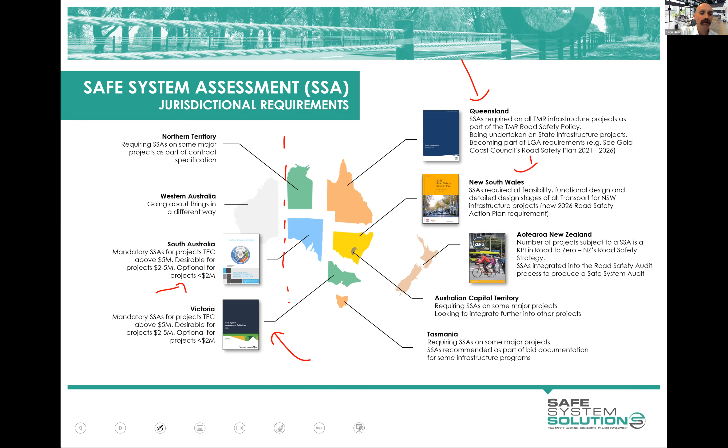Put a line down there. Okay, so what sort of benefit do we get out of doing this safe system assessment?

I mean, it's another process. Do we really need to add more processes into infrastructure projects and the like? Only if they're going to add value.

You know, town bypasses, we're talking major duplications of outer suburban arterial roads, freeway upgrades with extra interchanges and the like.

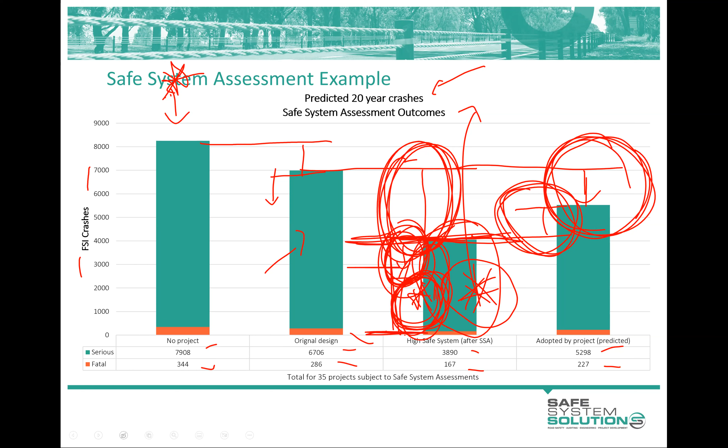Are you happy to get into more specific questions on people's safe system assessment? Okay, so referring to intersection values, got someone with a major road which is 12,000 vehicles, and the assessment takes in two intersections, one at 8,000 and the other at 9.5. So do we go 12 plus 8 plus 9.5 equals 29.5, or 12 plus 8 plus 12 plus 9.5 equals 41.5? Either way, it's a score of 4.

However, if it was a lower amount, which one would you do? So is this one intersection or multiple intersections? Two intersections. Are you drawing two intersections here? Yes, I am. Good, okay, great. So what did we say? The main road has 12,000. Yes. And this side road has 8. And the other one, 9.5.

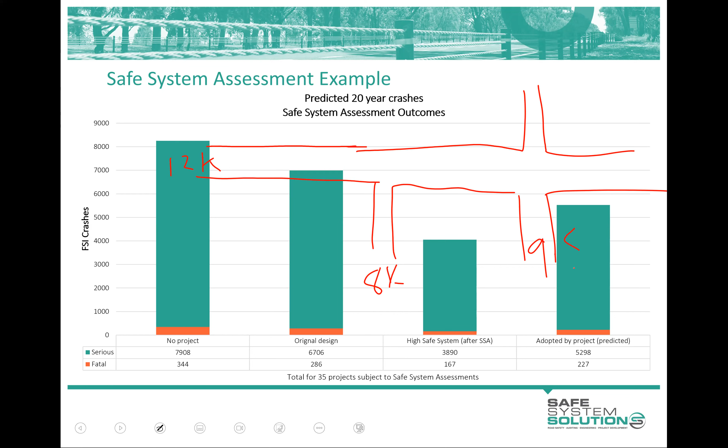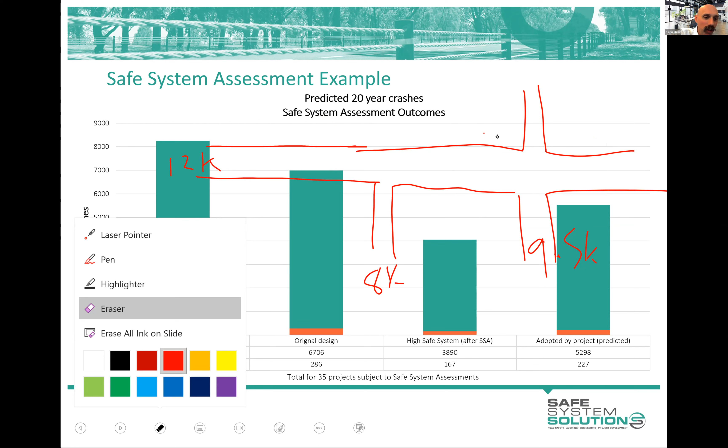So the way to do this, and we do have a fact sheet on this - if I was undertaking a safe system assessment on this, I would go... matrix 1, matrix 2. Actually, I would undo that, because that's pretty much right. I'm going to chop it up in a slightly different way. Matrix 1, matrix 2. So you actually do 2 matrices for this.

And that way you add your 12,000 and your 8,000 in this one, and your 9,500 and your 12,000 in this one. Those are your exposure scores, and you will produce 2 matrices and 2 graphs with all of your existing conditions and the like. I just leave it at that - I don't try to create one end score for the whole project.

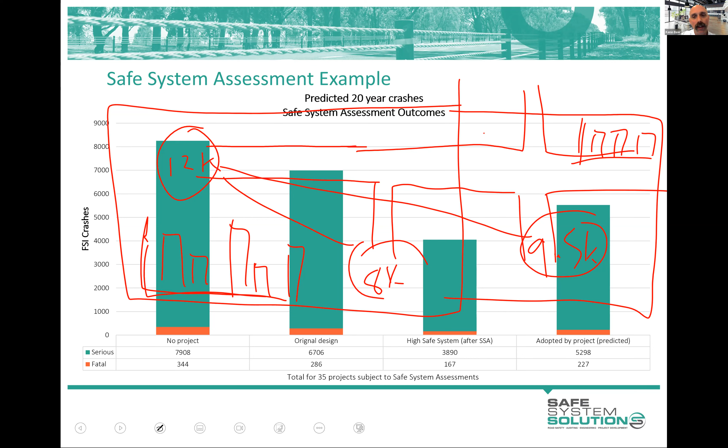The reason I do it like that, and our fact sheet tries to clarify this, is that the Victorian and South Australian governments have said these are 2 legitimate options to do it. But the reason - no, not that one - the fact sheet is actually about how to do a long route or a route project. It doesn't have any pretty pictures, it's more just text on this one.

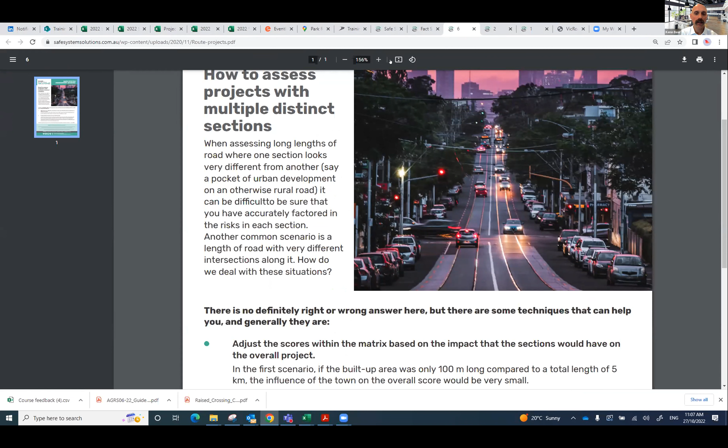The point I'm making there is the second dot point at the bottom - we can't see that, it's not displaying there, Kathy, if you can just scroll down a little bit. Yeah, so that's it. So produce separate matrices for each logical section - you try and find homogeneous sections and chop it up accordingly.

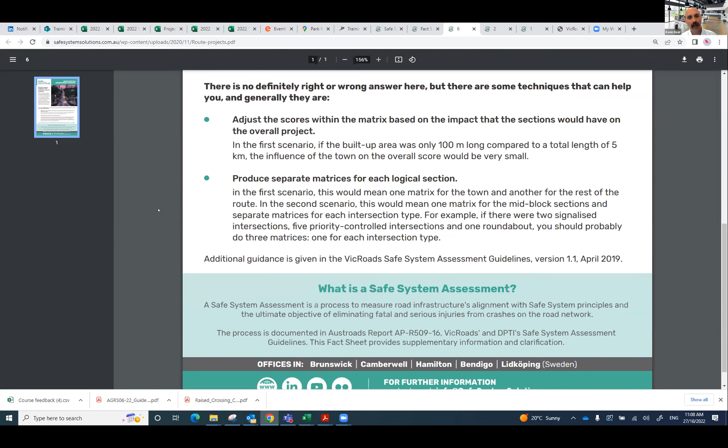The one above it is what my colleague Chris Hall loves doing, because he loves an 18-tab spreadsheet that goes berserk with weighted averages and the like, because you could in theory do weighted averages on all of these to bring it back to an individual score if you absolutely must. But my worry is that if people don't do that properly, you can actually hide deficiencies in an intersection by combining it with a really good intersection and getting an average.

To come back to what is the intention of a safe system assessment - it's to flag things that don't align well with safe system principles and to rectify them. And if we use the trickery of numbers to average things out, it's not a good outcome. The trickery of numbers, hey?

Okay, so for Walden, does he need to do 2 matrices? For the safe system assessment assignment? Yeah. No, you can just do one of them, you could just pick one of them. We'd be very comfortable with that. In the bit when it says scope of audit, you could do a snip of your design, or you could say you've done this intersection and lead in.

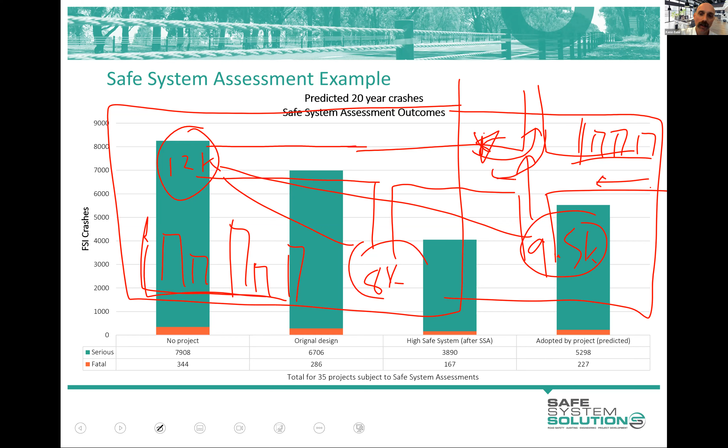Okay. Thanks, Kathy. Now, how are we going on time?

We're going to take a break at some point. It's probably a bit early for that. I'll plow through a little bit more, and I still do want to hopefully finish a little bit early so people have time to get stuck into some stuff. But I'll cover off a few more things.

Okay, the benefits of a safe system assessment. You saw there some numbers in terms of that evaluation, and anybody who would like a copy of that evaluation report, just email through, we can find that. Or it might have even been put in the learning management system, I'm not sure there.

A way of determining how well a project aligns with safe system principles - it's great, we've craved that for a long time. Safe system principles are fairly fluffy, high level principles, and we need something to measure against these. It's a method to compare project design options, with information on changes that will move a project closer to those safe system objectives. A method to assist planners, designers and project managers to take safe system from fluffiness to practice, and a sound basis for future planning and design of road infrastructure.

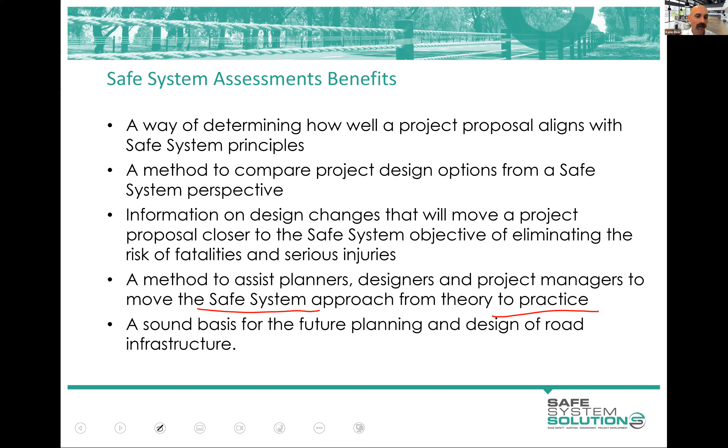Let's talk about the process you'd go through, be it as a local controlling authority, a local government, or a state controlling authority, or different project managers, and then where the safe system assessors can interject. Safe system assessments are best served early in a project. So we go concept, draft, details, build, open it to traffic. The earlier we can do it, the better.

Why? Because people are willing to change their project at these early stages. They are not willing to change much at the later stage. When you do a safe system assessment on a detailed design of a big project and tell them that you suggest they alter their intersection forms completely, they ain't happy. In fact, they don't do anything with it, or tell you to shred old copies of that report, because we never want that seeing the light of day, as we've just done all of our detailed design. Although they're willing to change minor bits and pieces.

Road safety audits, though, work better there, because just the nature of how they're presented, and what they look at, can often be much, much better at these later stages.

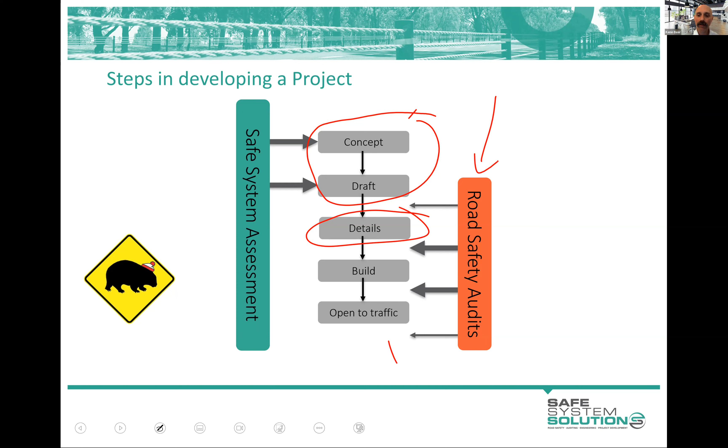And the difference between a road safety audit and a safe system assessment - I'll put a little disclaimer in here. I think it's got significantly better after we released the 2022 version of the Austroads Guide to Road Safety Part 6, which integrated a whole lot of stuff in. But I still say that both road safety audit and safe system assessment do a great job with likelihood identification. Severity, road safety audits only sometimes.

It's sort of integrated into road safety auditing. However, in practice, it just doesn't work sometimes. The absolute classic is that set of traffic signals on a high-ish speed road, 70 or 80 kilometre per hour road, and the road safety audit at no point mentions the scenario of people running the red light and the impact forces we're trying to handle. Everything in the audit is associated with sight lines to the signals, advanced warning, phasing, timing, these sorts of things, trying to ensure everybody has the best opportunity to see and react to the signals. Hugely important stuff, but missing that one of, okay, now somebody didn't. What do we do? What's the forces?

Exposure as its own entity doesn't occur in a road safety audit. It's packed into the likelihood.

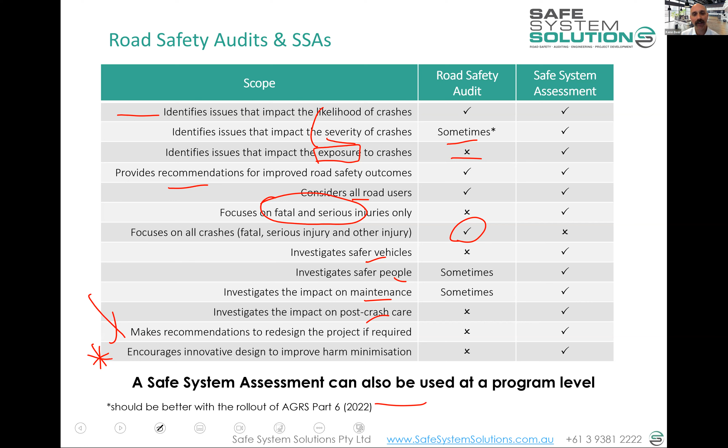Okay, a process that we can go through here. This is the common process of how a safe system assessment happens. So first of all, somebody, and I'm going to say client here, and that could be a road authority or the like, they decide they want a safe system assessment done. Sometimes there's a policy or a strategy that demands that, as I showed you earlier. And they decide, are they going to do a full safe system assessment or a rapid one? I will take you through the difference between those shortly. You're currently doing a rapid safe system assessment. A full one just has a little bit more to it, not a huge amount more.

So the client, and maybe the designer as well, they select the safe system assessment team. Usually if they find a nice independent team that knows this process, has completed this course, and then they appoint them to do this assessment.

They have some sort of commencement meeting and handing over of information. They give them the designs, they give them the project background. This is usually a combined thing. They ask lots of questions about the project. Why are they doing it? What's this? Have you got future growth? Do you know numbers of pedestrians and cyclists? Are there any schools in the area? The list goes on. That's often done in a workshop or the like.

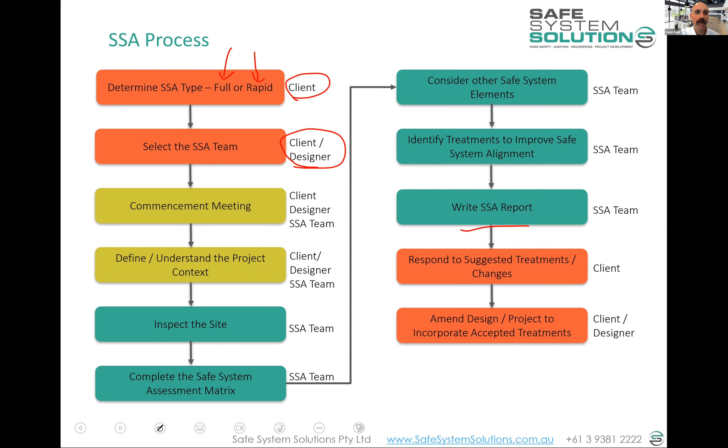Probably a good time just to check if there's any questions at this stage, before I jump into a little bit about guidance and registration and the like.

There's a comment here asking about recommendations sometimes being for RSA, pending who the client or road authority has requested. I'm not 100% sure I follow that... Actually, I think I understand. New South Wales doesn't do recommendations in road safety audits. They're the only jurisdiction that doesn't, and everybody else makes recommendations as part of a road safety audit report. So that may cause some of the confusion around who's asking for it, which road authority.

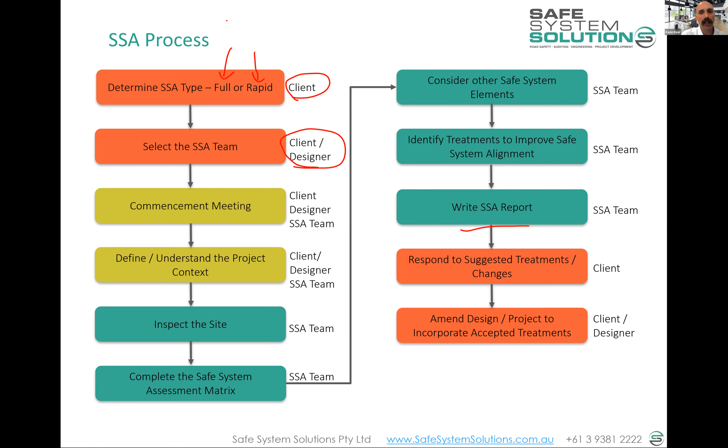And David's point is, as designers in transport, we will get asked on treatments. Okay, good. I'm going to do a few more slides and then we'll have a break, and I'll give people some time to finish off quizzes and really get stuck into that safe system assessment.

They have this thing called a register of recommended safe system assessors. How do you get on this list? Well, you successfully complete this course to start, and then you do an actual safe system assessment. Now the mock one you're doing doesn't count, because you don't have a real client, you haven't collected a lot of background context and information, and you haven't gone through the full process and written up a full report. But you've done pretty well.

So you do that assessment and then you submit it, and they actually review it. If they believe you've proved that you understand the process and you're able to identify things, they put you on the list. That's all there, and then they just publish the list - it's a big PDF of people and contact details who are recommended safe system assessors. So you can get yourself on that if you would like.

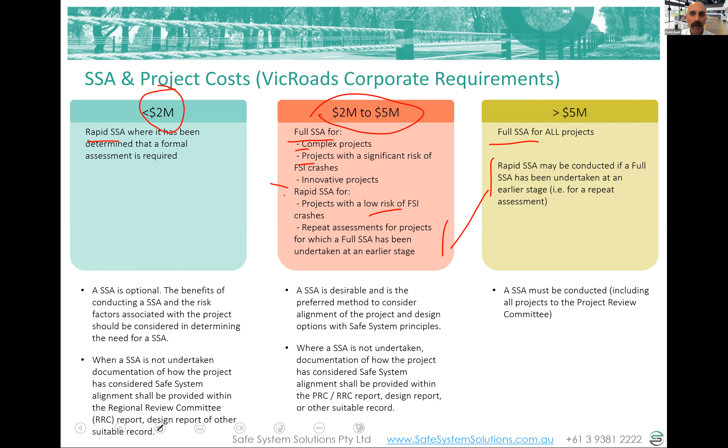So what is the difference there? I said they're kind of not hugely different, but let me take you through that. So I think the easiest way to do this is to talk you through what's in a full safe system assessment and then sort of cross out things if under a rapid you wouldn't need to do it completely.

So commencement meeting as such, well, that's one which can be crossed out, because a lot of safe system assessments you do that anyway. It might be a Teams meeting, it might be the like, but sometimes in the rapid safe system assessment, your client knows what's happening and everybody's on the same page, and it's just the information you need and off you go.

Project background and context, well, you're going to need that in all. The workshop, sitting around and really nutting into the details, that's kind of optional under both scenarios. But it's very rare that it's a big formal workshop in a rapid.

Site inspection, again, I sort of cross that out. You then do the existing conditions matrix and all the design options in both. You don't do those other qualitative questions under a rapid.

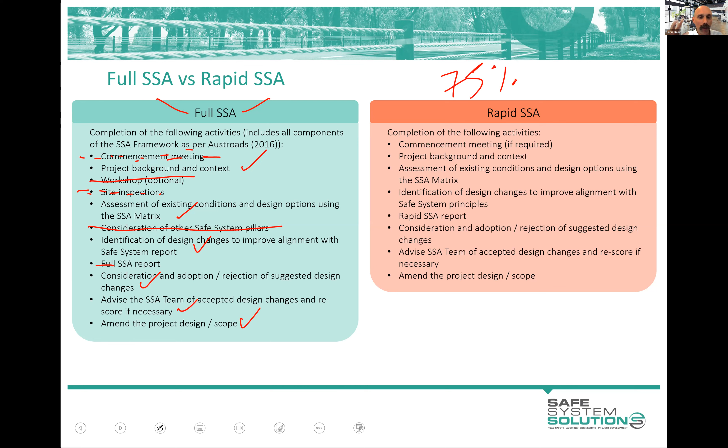Okay, so the last thing I want to do is just touch on different road environments and what would align well with safe system principles. So why do I do this? Well, the reason I do this is you have been given one site to do a safe system assessment on.

You did a bit of a look at another intersection yourself, which was great. But when we give you a certificate of successful completion, it doesn't say you have successfully completed and can do safe system assessments on minor road intersections or on arterial road intersections. It just says you can do safe system assessments.

And that could be on a motorway, it could be on a local street, it could be on a new cycleway, it could be on a public transport project, it could be in a shopping hub, it could be on a high-speed rural road. Okay, so I just want to finally touch on a few things we know about some of these road environments.

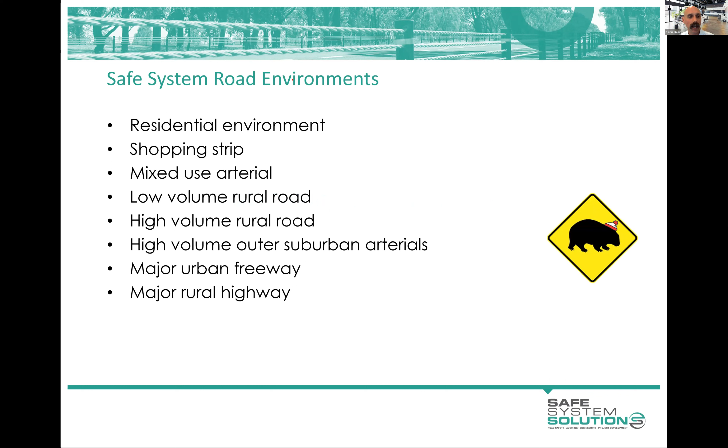And we'll go from there. So I'm going to cover off residential streets, shopping strips, mixed-use arterials, low and high volume rural roads, outer suburban arterials, and urban freeways and or motorways and major rural highways.

Okay, so residential environments like this one, we really recognize there's low movement requirements through here in passenger vehicles, thus we can blanket speeds down, local area traffic management, looking at exposure. Do we need access to these areas? Can some of these be blocked off from that access, lessening the exposure, so fewer vehicles through there? Local area traffic management is really key.

Things like removing parking to open up sight lines can induce higher speeds, so be cautious of that. Removing car parking to give more bike access or extend nature areas is great, but just be aware of that sort of stuff. So, lower speed, getting vehicle speeds lower and trying to reduce the exposure of vehicles.

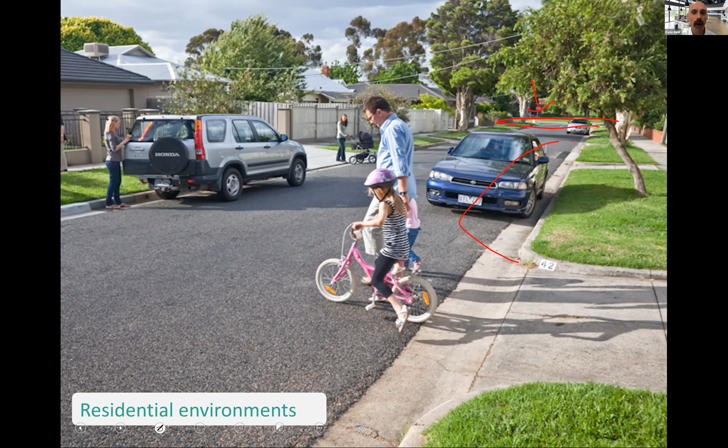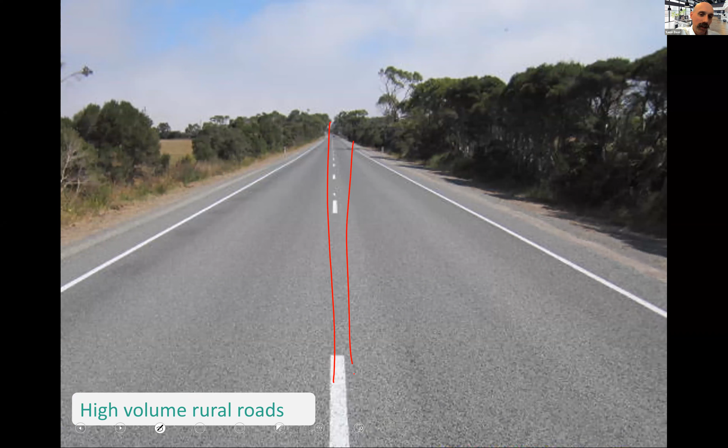Central barrier system in a flush narrow median, outer barrier systems, and then at intersections, and major intersections with roundabouts, could be compact roundabouts or the like. You've got a central barrier system down there. You can collect a few access points along the journey so they can use that as a U-turn opportunity. And that's a really nice, well-aligned, safe system style setup.

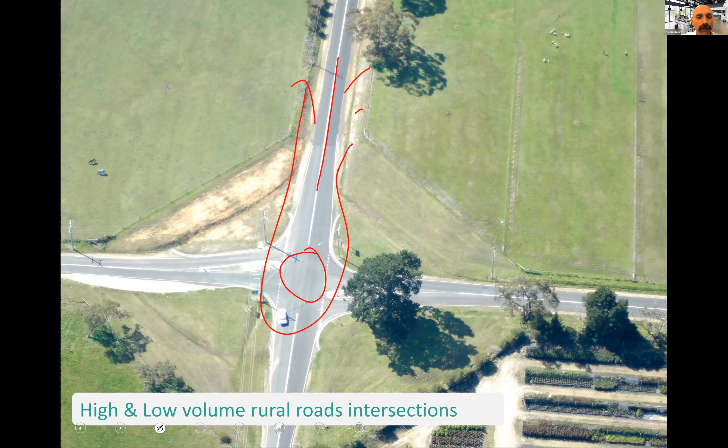And we are within our ability, or we should be suggesting measures to really restrict pedestrians crossing these areas, replacing things like bus stops at appropriate crossing points. It is not a place - this does not have place value. This is a movement corridor, and so we should be accepting of removing things that add to place value, which is permeability, the ability to cross in lots of locations easily, to be there.

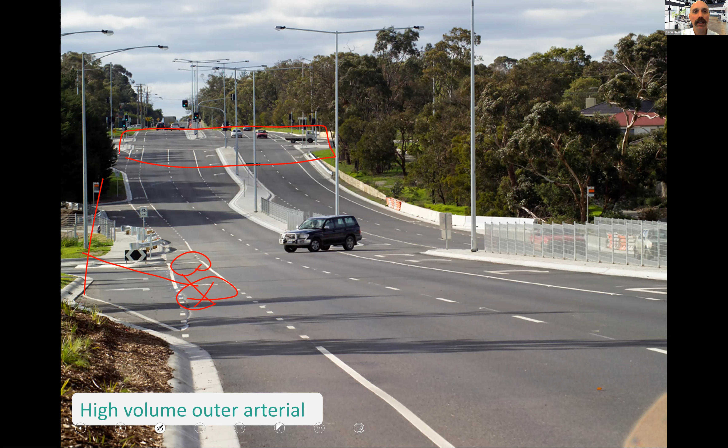We do want to think about intersections and raising intersections and slowing vehicles through those points, but we're starting to move it more to like urban motorway style thinking. And motorways really perform really well from a road safety perspective the majority of the time. They have good alignment with safe system principles because we don't have intersections - the intersections are these on-ramps where vehicles are at speed.

So our delta V, our change in speed in crashes, is low. They have continuous barrier systems, good lighting, well designed geometrically. Most of the time they've got shoulders, but sometimes that gets eaten up for traffic. But the time where these don't perform as well is as flow breaks down. So when they're free flowing, they perform really, really well. When they're absolutely stuffed - clogged, saturated, not moving fast at all - there's not enough speed for death and serious injury. We get lots of minor scrapes and bumps.

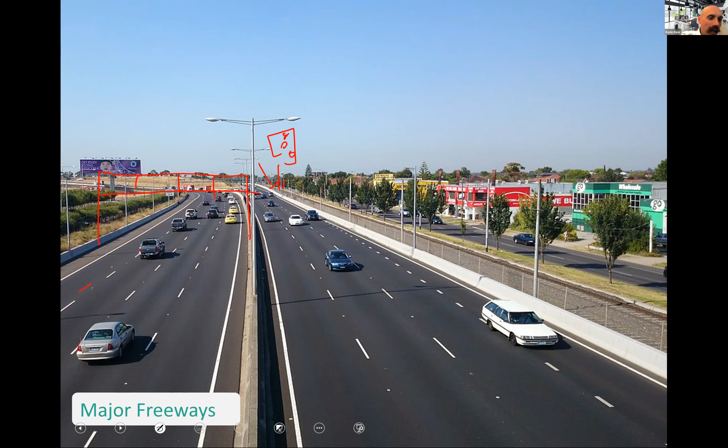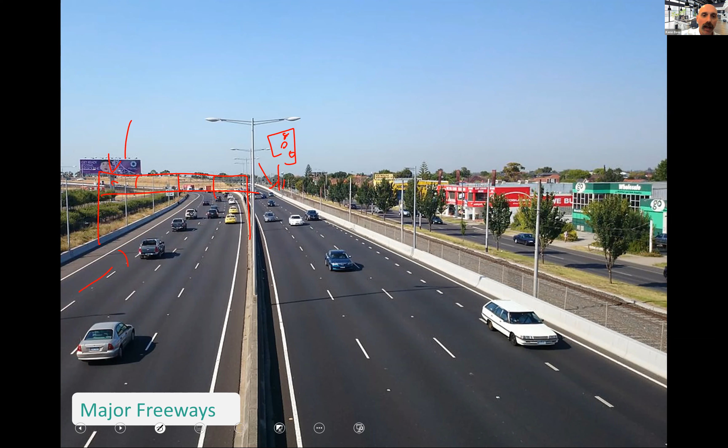It's as they've got speed and the flow starts to break down. And so really the frontier in these areas is your managed motorways - your gantries over the road, your lane use management system, your on-ramps having metering, traffic signals on the on-ramp letting vehicles out. So the lane use management system gives you the ability to use automation or other means to identify things like a flow breakdown coming up, proactively drop the speed down, warn of things. You'll see those deployed out on most motorways - it's already out there on a lot of them, but it'll continue to roll out. And finally, major rural highways.

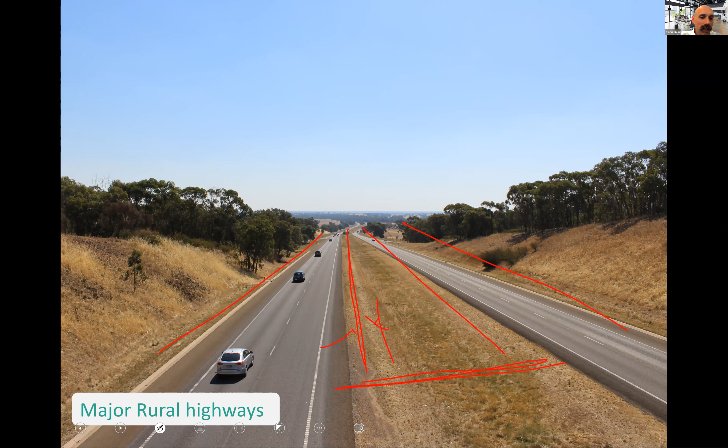And this one, we really see - Pacific highways, the Hume, and the like, they're just going to get, if they've got a wide median already, continuous barrier systems through a lot of it. If it's being duplicated, it won't be duplicated with that much. It's just going to be duplicated with enough to get one barrier system down the middle and maybe some area for a car to pull over, but even then you can sometimes not use that and just have the left pull over.

And at the intersections, grade separation, of course, that's going to remove the exposure to crashes. But if you've got minor ones and you really can't close them off and divert them, there is sort of one way you can do it that highly aligns with safe system principles. Knock that up a little bit.

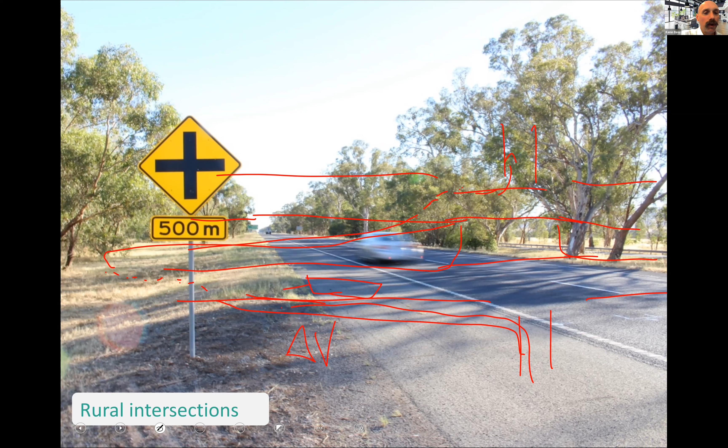They come back, you get your delta V's the same, and they can make their choice. So that's if you don't want to do something that significantly impacts the through traffic speed. Often on one like this, for example, the Hume, there was a lot of reluctance to things like roundabouts because it's a major freight route with lots of vehicles, and they didn't want to slow down every time they came to an intersection with a roundabout. So that's the sort of option to accelerate them up and have that alteration, which does align quite highly with safe system principles.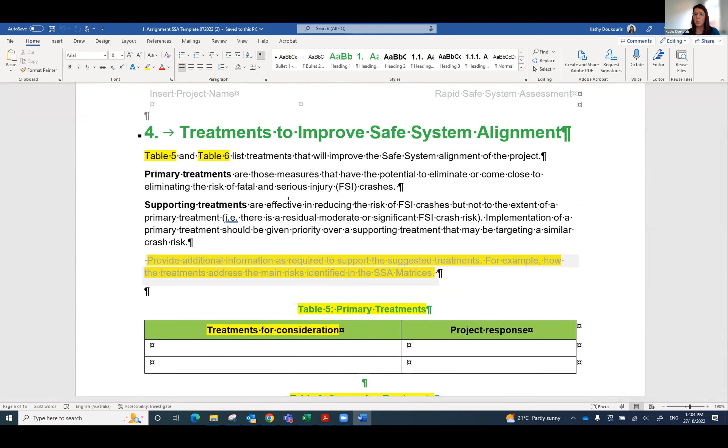And there's some examples in there for you. Update all this. Make sure you get yourself a selfie when you're out on site, like so, to add in at the end. And then you're also looking for those primary treatments and supporting treatments.

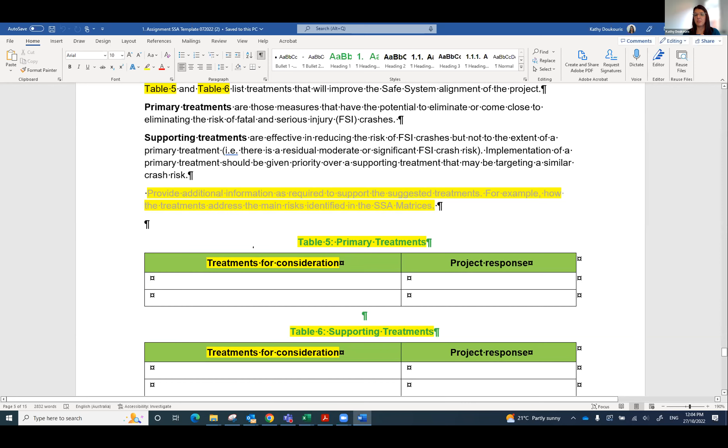So you're going to make some recommendations here about what treatments could be considered for this particular design. That was the information in the Safe System Assessment Framework, and there's some ideas in there for you. So you do all this, save as a PDF and submit through the learning management system by next Thursday, and then we'll spend some time marking them after that.

And once that's all done and you've completed all your quizzes as well - there's a very short quiz for today - then you can jump into the feedback and certificate section and give us some feedback on the course. It's a very quick multiple choice style quiz, and then your certificate will no longer be restricted once you've completed everything and your stuff's been marked, so you can download a copy there. We'll also send you a hard copy in the mail, as well as any prizes you've won along the way. And I think that's everything. Does anyone have any questions on that?